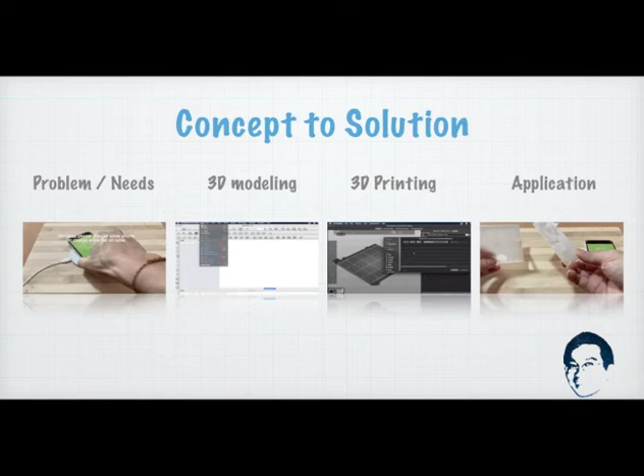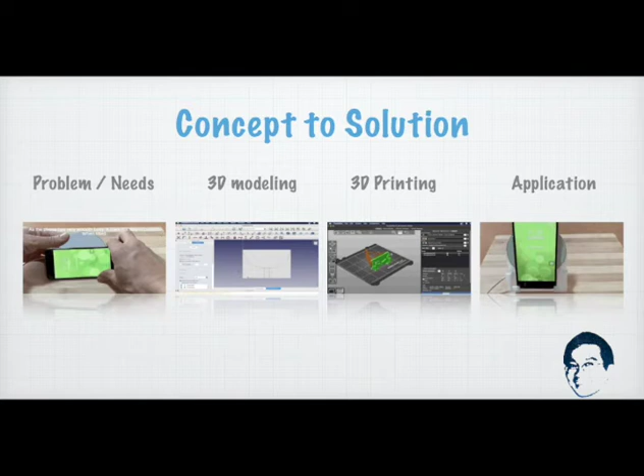In this video, I'm going to touch on how to model a smartphone stand for a wireless charger so that I can use the phone in portrait or landscape orientation at an elevated angle while the phone is being charged. I have these wireless phone chargers and the phone can only be charged with the wireless charger flat on the table. Even when trying to elevate it with some object, it is very difficult to ensure the phone keeps charging and allow use at the same time.

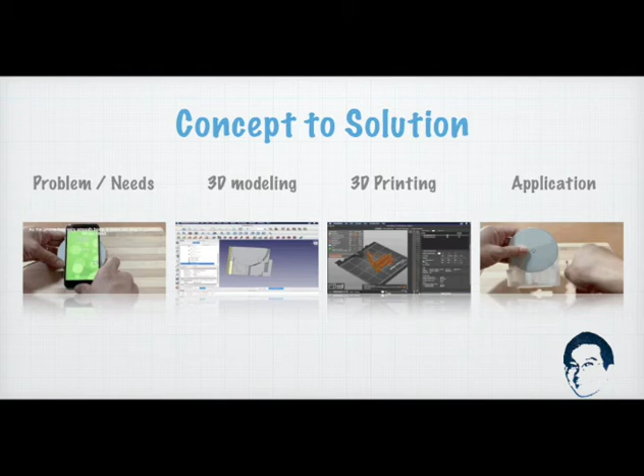So if there is a phone stand that can hold the wireless charger at an elevated angle and allow me to use it while charging, that will be good. Alright, let's get started with the 3D modeling of the wireless charger phone stand. Start your FreeCAD. If you do not have a copy of FreeCAD, go to freecadweb.org. There are installers for Windows, Mac and Linux.

In your FreeCAD, select Part Design Workbench, start a new document. You can go to File, New, or click on the New Document tool on the toolbar. Create a new body, a new sketch. Select the XY plane. The first thing we're going to create is a rectangle. Select the rectangle tool, sketch the rectangle, constrain the lower left corner of the rectangle to the axis origin.

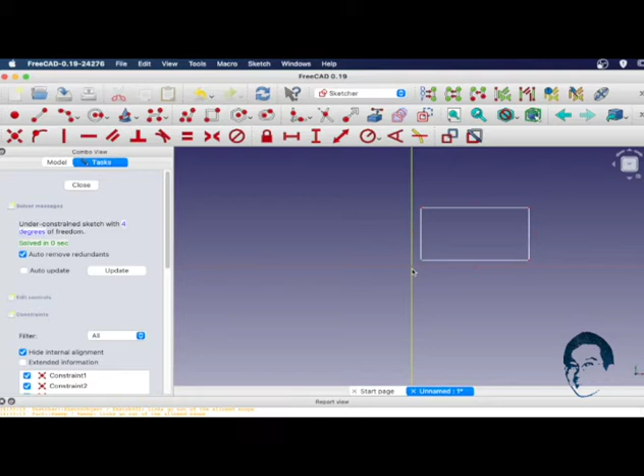The horizontal length is 96 mm. The vertical length is 71 mm. We are good with that. You can see that the sketch is fully constrained. Close it and pad it up with 9 mm thickness. Alright, the next thing, select the top of the surface here and create another new sketch here.

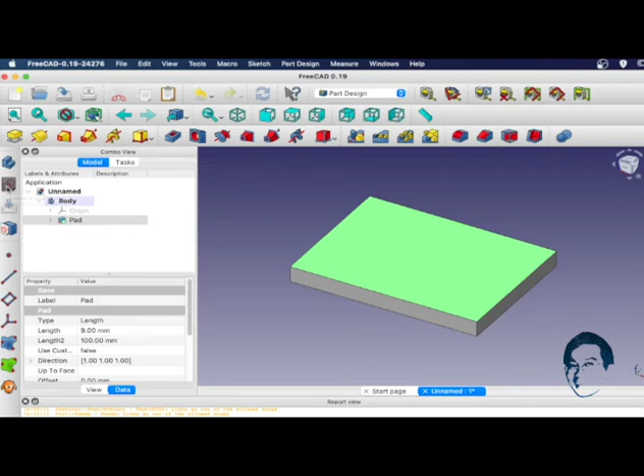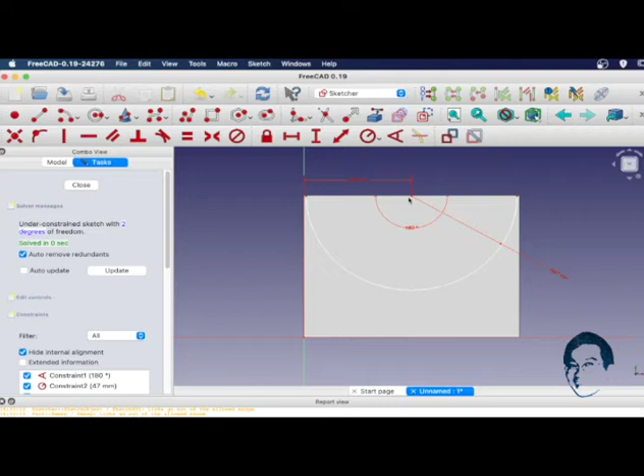For this, we're going to draw a semicircle up here to hold the wireless charger. The center and end point up from the center here. Draw the semicircle. Select the semicircle, pick the angle, set it to 180 degrees and the radius is 47. Select the center of the semicircle to the origin. The horizontal distance is 48. Right, and the vertical distance to the origin from the center of the semicircle is 71.

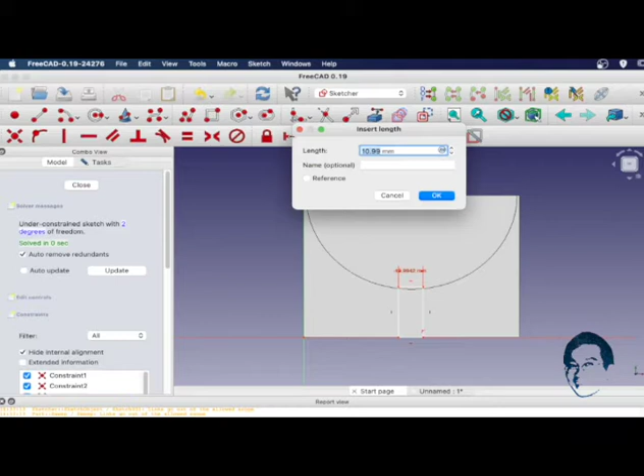Next, connect a straight line across the two end points of the semicircle. Okay, and you can see that it's fully constrained. Close it. Now we want to create a pocket here, and the pocket depth is 7 mm. Select the surface again, create a new sketch, draw a rectangle. Width of the rectangle is 10 mm. The distance from the bottom left corner to the origin is 43.

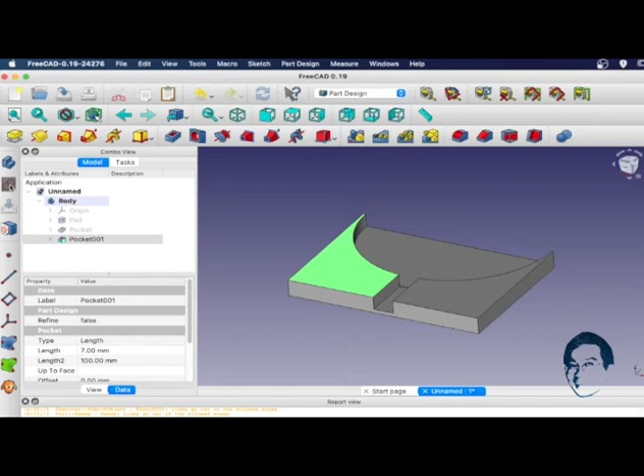The vertical distance will be 25 mm as long as it cuts across the semicircle. Sketch fully constrained, close it. With the sketch, create a 7 mm pocket. Select the top surface again and create a new sketch. Draw a vertical line along the y-axis. Connect the end point and draw a horizontal line along the x-axis.

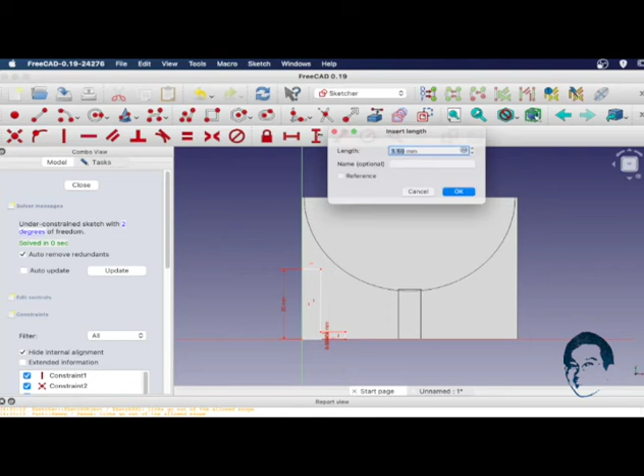Then vertical up followed by another horizontal line back and vertical up again and close the shape with the horizontal line. Select bottom left and the origin, constrain it. Select the vertical line on the y-axis and set the distance to 35 mm. The shortest vertical line to 2 mm. Set the shortest horizontal line distance to 9 mm. Next, set the longer horizontal line distance to 21 mm.

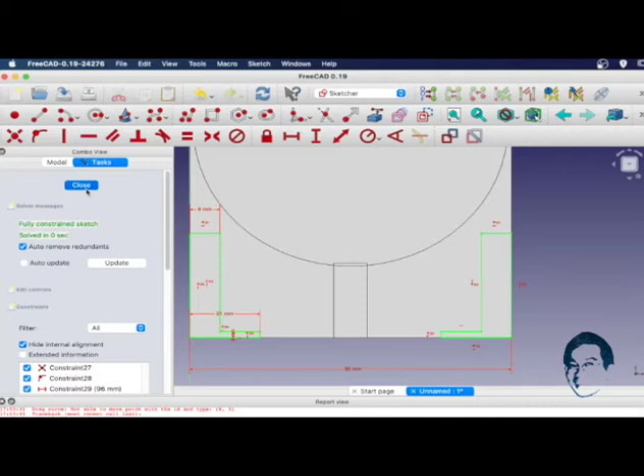You can see that it's fully constrained. Now let's mirror the shape over onto the right side of the sketch. Sketch fully constrained, close it. Next, pad the sketch up to 11 mm. Select the top surface again and create a new sketch. Draw a vertical line along the y-axis. Connect the end point and draw a horizontal line across the x-axis.

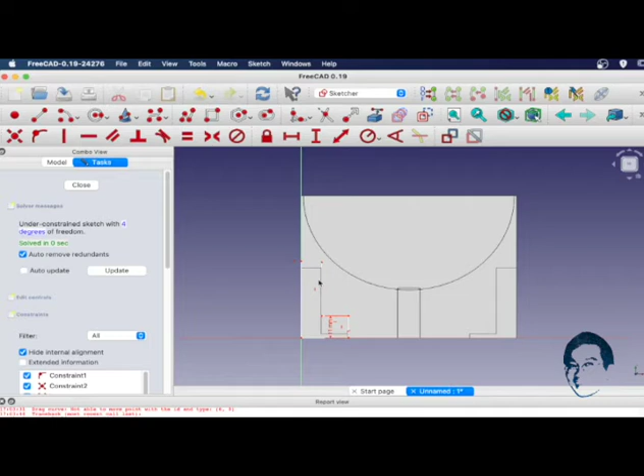Then vertical up followed by another horizontal line back and vertical up again and close the shape with the horizontal line. Set the shorter vertical line to 11 mm. Longest vertical line to 44 mm. Set the shortest horizontal line distance to 9 mm. Now let's mirror the shape over onto the right side of the sketch here. Sketch fully constrained, close it. Pad the sketch up by 2 mm.

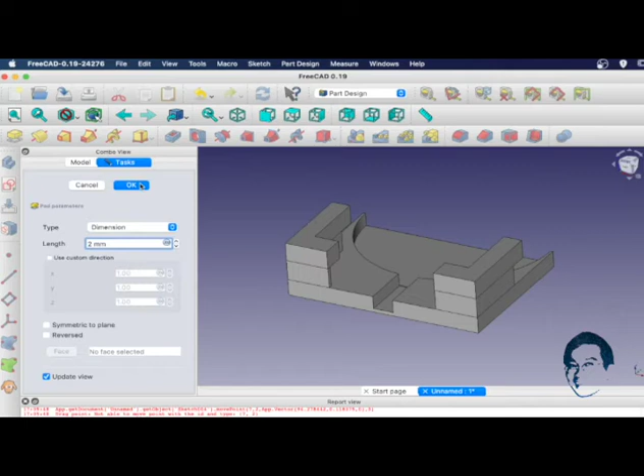Rotate the model to the back and select the surface. Create a new sketch. Use the line tool and sketch a U shape as what you see here. Horizontal, vertical up, horizontal again, and vertical down, and then horizontal across, vertical up, and close it with a horizontal line.

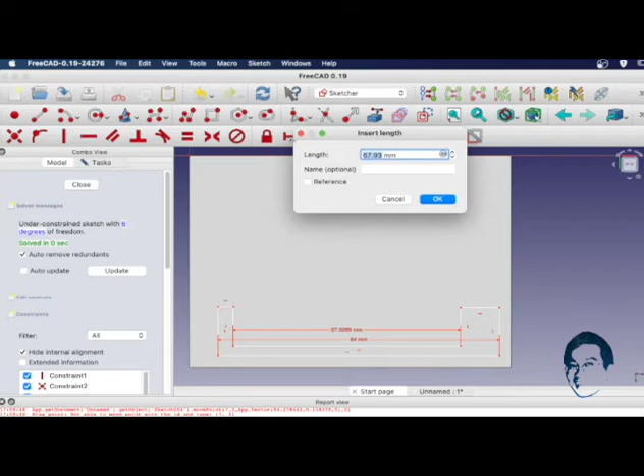The longest horizontal line distance is 84 mm. The next longest horizontal line distance is 80 mm. The longest vertical line distance is 17 mm.

And the width between the two horizontal lines is 2 mm. The width between the two vertical... bottom corner of the shape to the origin is 71 mm. And the width from the origin to the bottom left is 6 mm.

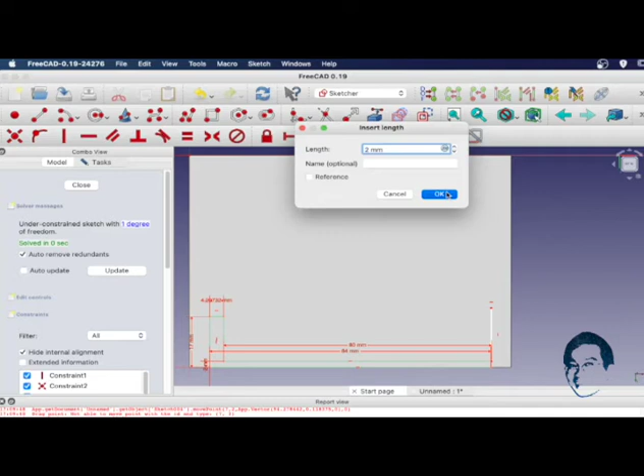The width between the two vertical lines is 2 mm. Same applies to the right side of the two vertical lines. Make the two vertical lines equal. Now the sketch is fully constrained, close it. Pad the sketch up by 2 mm. Select surface to create a new sketch.

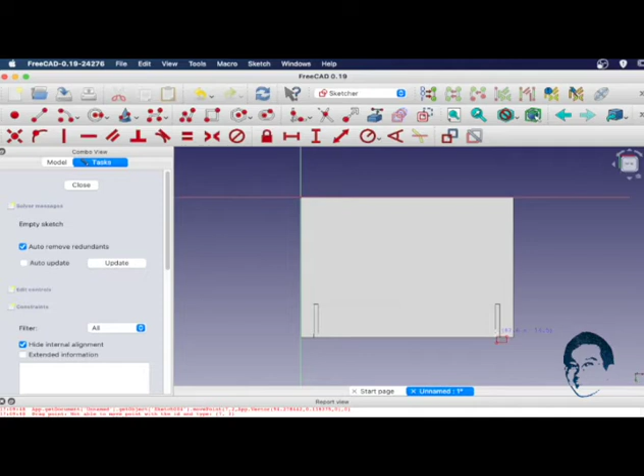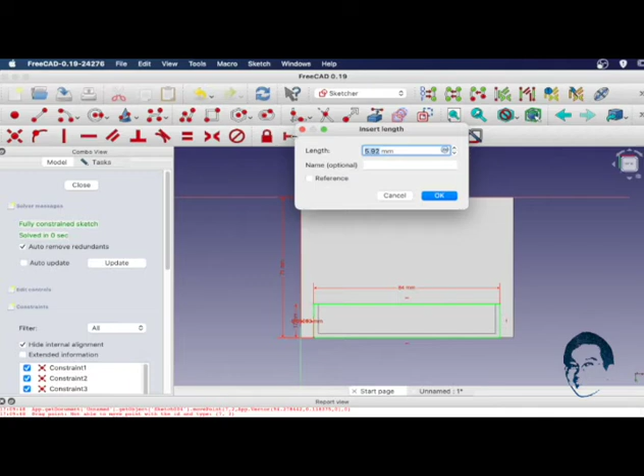Use rectangle tools. Draw a rectangle. The width of the rectangle is 84 mm. The height of the rectangle is 17 mm. The bottom left corner to the origin, the vertical height is 71 mm. And the bottom left to the origin, the width is 6 mm. Sketch fully constrained, close it. Pad the sketch up by 2 mm.

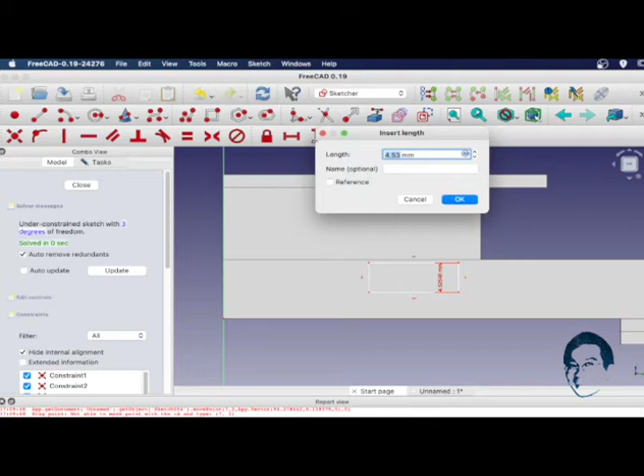Create a new sketch. Use the rectangle tools to sketch a rectangle. The height of the rectangle is 6 mm. The width of the rectangle is 12 mm. From top left corner to origin, the horizontal distance is 23 mm. Top left corner to origin, the vertical distance is 8 mm. Sketch fully constrained, close it.

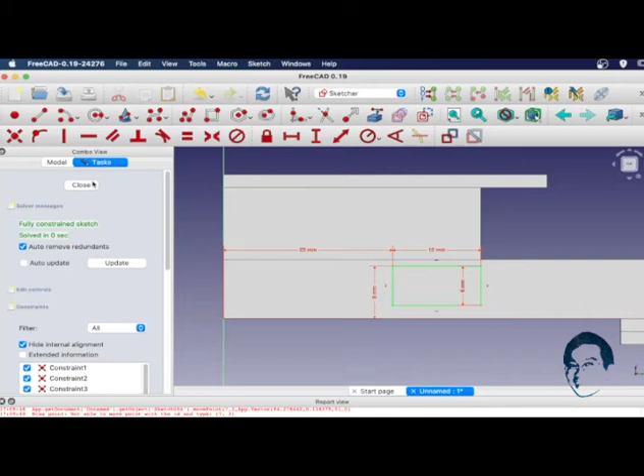Create a new sketch. XY plane, change the mode to wireframe. Select a straight line. Set the angle to 30 degrees on the line with the x-axis. The distance from the end point of the line to the origin is 96 mm, and the height from the end point to the origin is 29 mm. Close it.

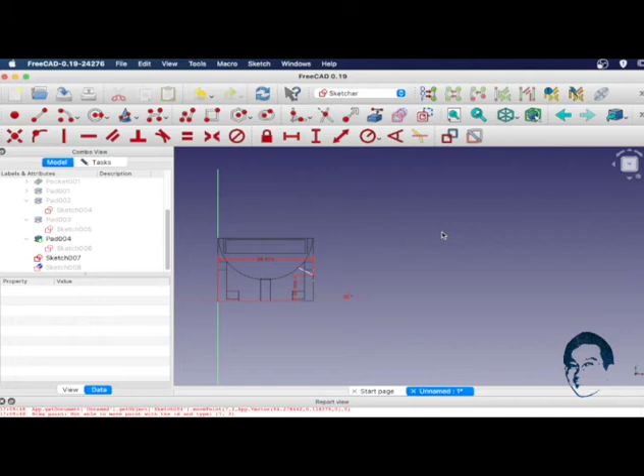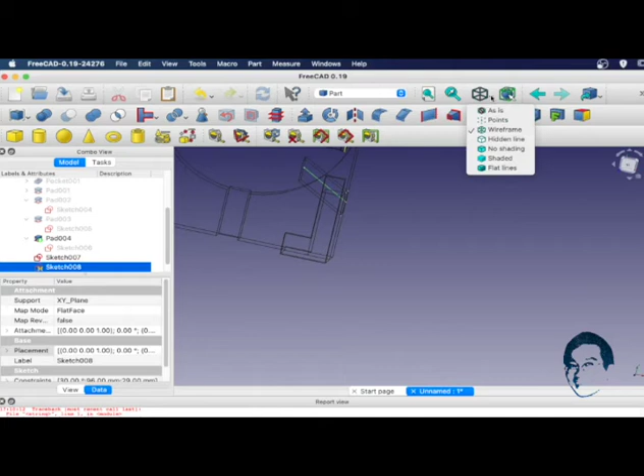Select Part Workbench. Then Sweep Utility. Select Rectangle Profile. Check Create Solid. Click on Sweep Path button. Select the line and click Done, then OK. Change it back to as is. Select the object, then the sweep object, followed by Cut. And you can see the hole is being cut.

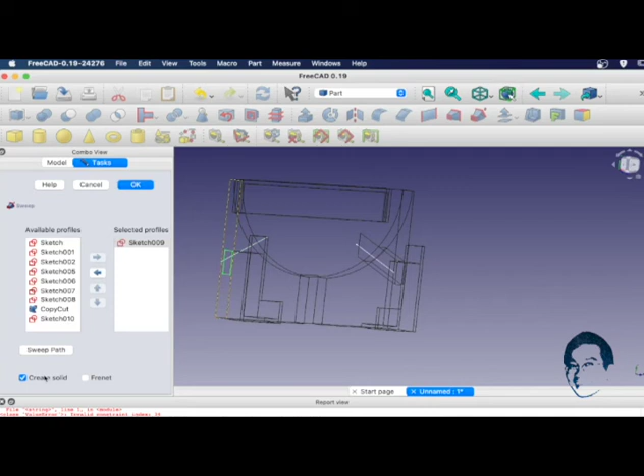Go back to Part Design Workbench. We will repeat the same cut on the left side of the object here. Now we have both hole cuts. The next thing we're going to do is to add some fillet onto the object itself. Select the top edge of the two shapes, followed by the lower edge, then the fillet tools. Set the radius to 3 mm.

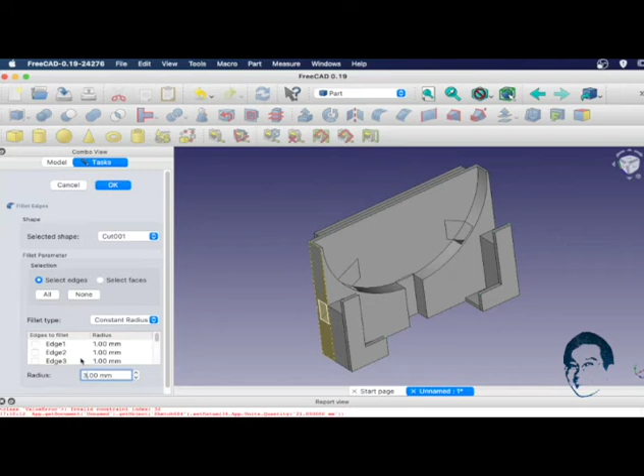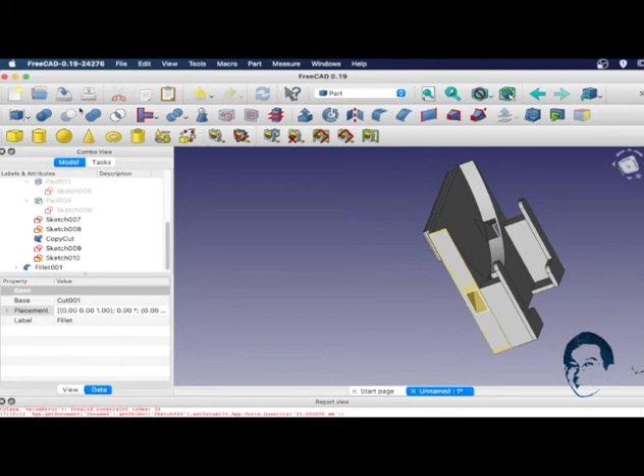Next, rotate the model. Select the top edge and the side edge, followed by the fillet tool. Set it to 1 mm radius. Alright, that's what we need to do for this model itself. Next, save the model. We'll give the model the file name of Charger Part 1.

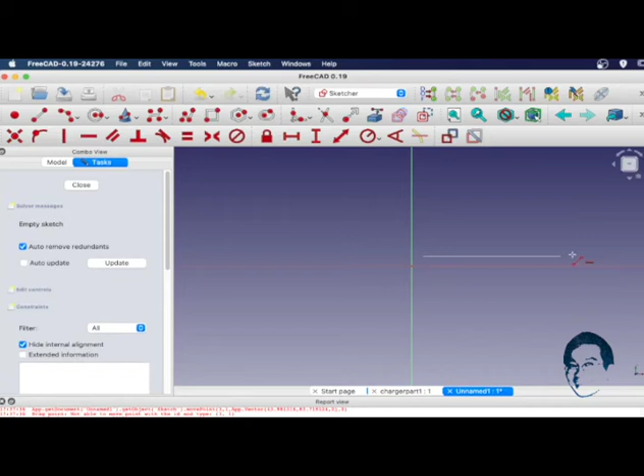Go to Part Design. Next, create a new document, new body, followed by a new sketch. Select XY plane. Take the line to draw a horizontal line along the x-axis. Set the line distance to 81 mm. Select the left endpoint of the line and the origin. Constrain them together.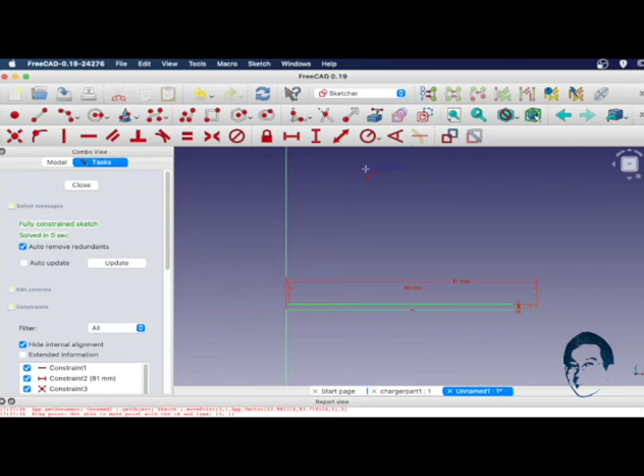Draw a vertical line up from the right endpoint and another horizontal line to the left. Select the horizontal line, set the width to 80 mm. Select the vertical line and make it perpendicular to the axis. And select the vertical line and set the distance to 2 mm. Take the line to draw a diagonal line to the y-axis. Set the length to 81 mm.

Draw another line parallel to this line and set them to equal length. Next, connect the two top endpoints with another line and set the angle between the short line and the long line to 90 degrees so that they are perpendicular to each other. Set the short line distance to 2 mm. And between the two lower endpoints, set the distance between them to 2 mm as well.

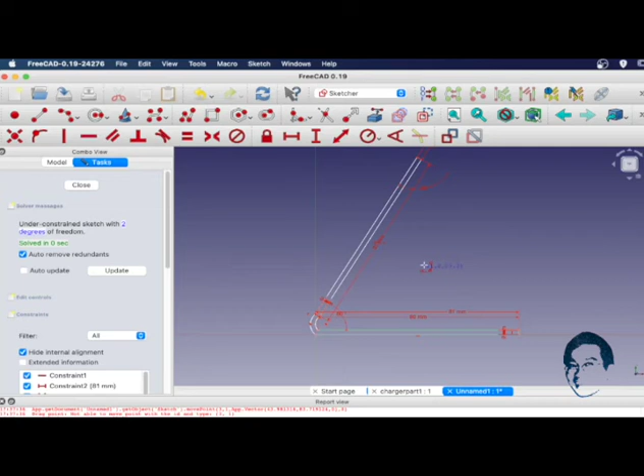Constrain the endpoint to the y-axis. Select the lower diagonal line and one of the horizontal lines, set the angle to 60 degrees. Next, take the arc tools and connect the line together between the outer line and also the inner two lines. Make them as smooth as possible. Close sketch. With the sketch, pad it up to 72 mm.

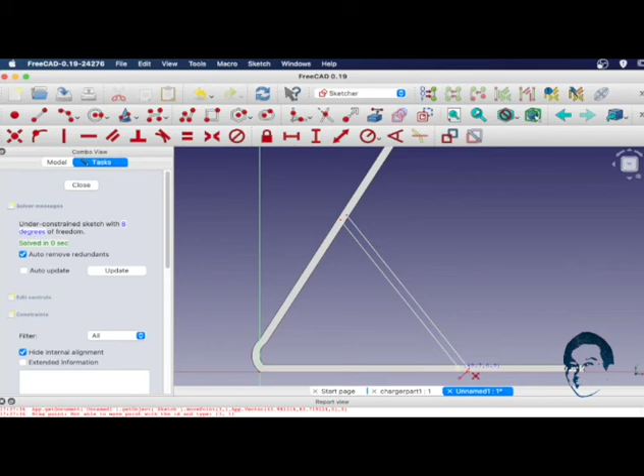Select the surface of the side, create a new sketch. Use a line tool, draw two lines to cross the shape. Connect the two endpoints with the line again. Set the width to 2 mm. Set the distance between the origin to the first point to 54 mm. Set the angle between the line to be 60 degrees.

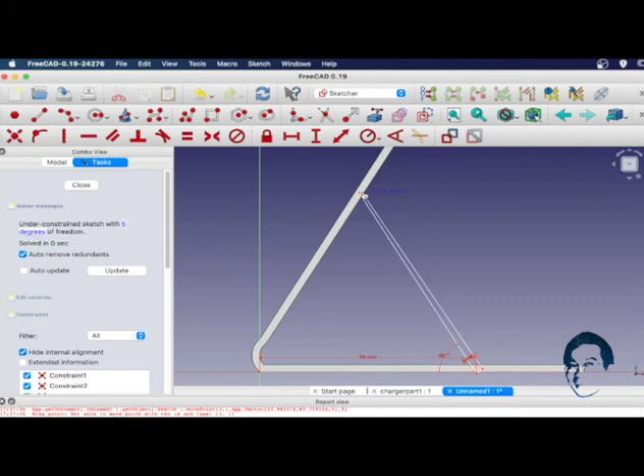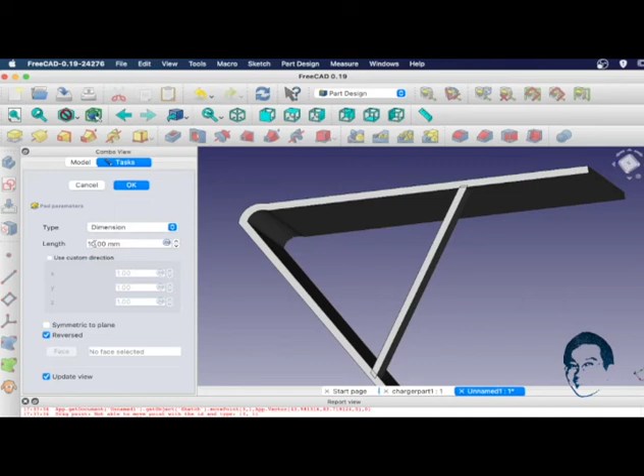Now set this distance to 2 mm as well. Do a slight adjustment to make sure that they are in the drawing. Close the sketch. Now pad it up, select reverse and change the length to 6 mm. Now we'll repeat the same on the other side of the object itself.

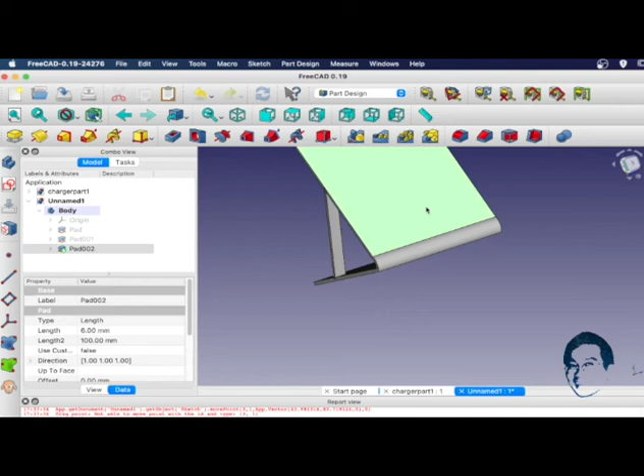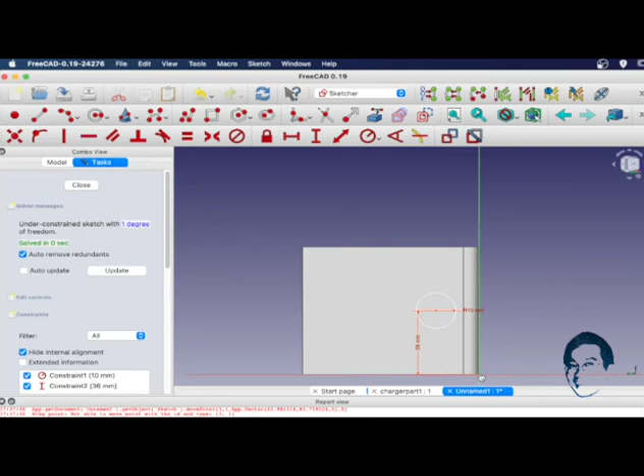Rotate and select the surface here, create a new sketch. Select the circle tools, add a circle to the surface here. Set the radius of the circle to 10 mm. Next, from the center of the circle to the origin, the vertical height is 36 mm. And from the center of the circle to the origin, the horizontal distance is 20 mm.

We are good. Close the sketch. Create a pocket of this. Alright, we will just take the default setting, close it. This one looks good. The next thing we're going to do is to select the four corners here. Select the fillet tools. Add a 3 mm fillet for this.

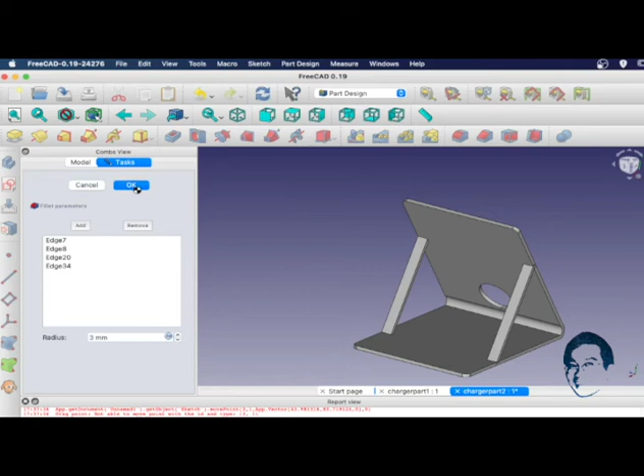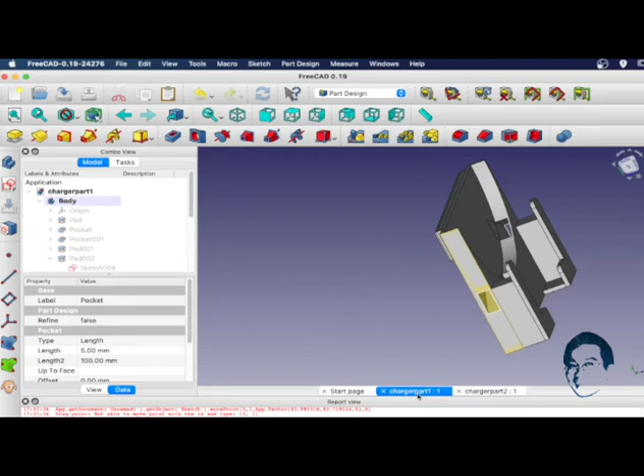Alright, save it and we'll call it Charger Part 2. Alright, with that we can export it to STL format. Select the object and export to STL Charger Part 2. Save it. We have yet to export the Charger Part 1 to STL, so let's do it. Select the model and export it to Charger Part 1.

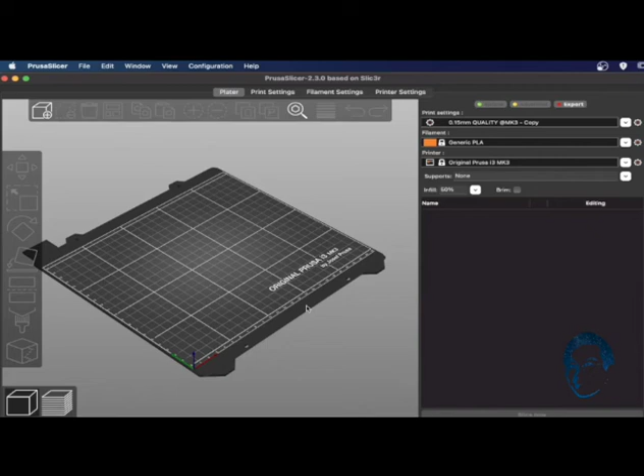Save it. With the 3D model done and exported to STL format, we are now ready to import the STL into the 3D printer slicer software. In the slicer software, click Add, select the STL file Charger Part 1 and Part 2, open it,

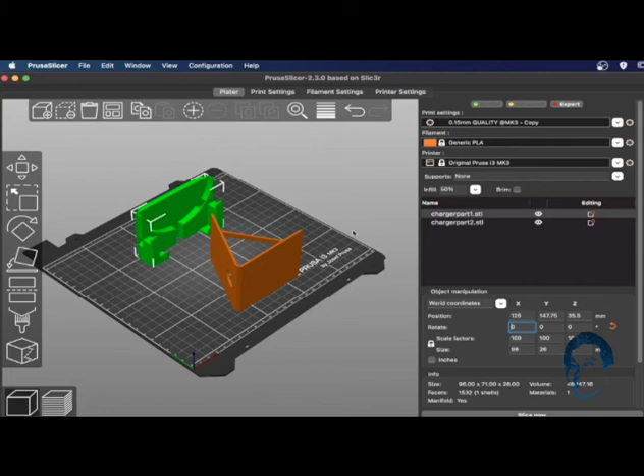click on Arrange. We will need to rotate the first part of the object, rotate 90 degrees by X-axis, rearrange them, and we also add the support from build plate itself. This will allow the slicer to add the support structure for the protruding part of part 1.

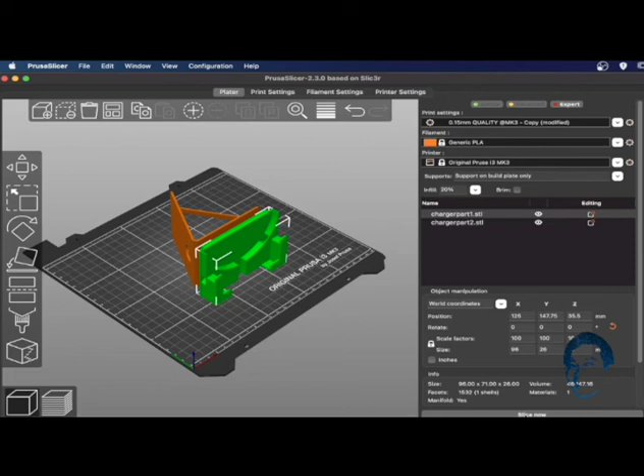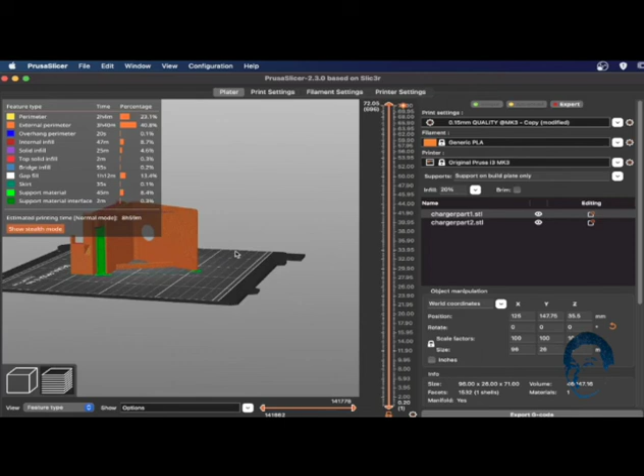For this, we will print with PLA, and the infill we will leave it at 20%, and that's sufficient for this to print. Alright, if we are good, we click on Slice now. And the green color here shows the support structure that we added. You can rotate it to look at the various angles of how it looks. You can drag the orange color bar on the right to look at how each layer of the slice looks like.

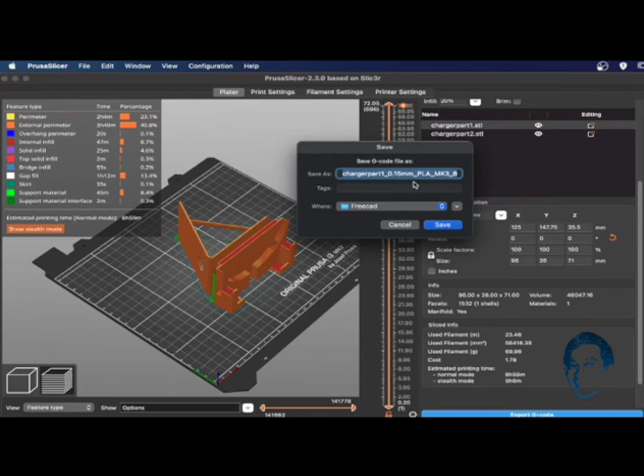Go to the lower right button, you can see that this model requires about 9 hours to print, and it will require about 23 meters of filament. When everything is good, click on Export G-code to get the model exported to the printable format. Use the default name given, or you can key in your own name for the G-code. When it's done, a pop-up message will show you export is successful. Now you can copy the G-code to the printer to print.

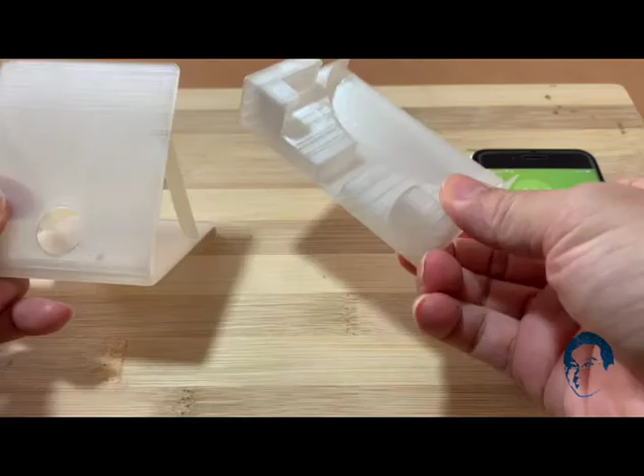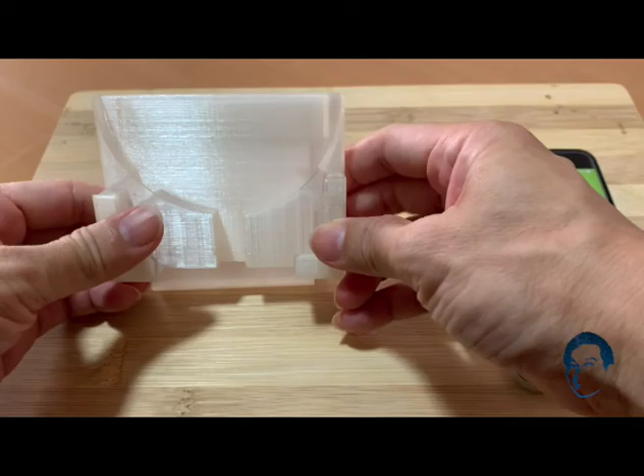With the 3D model printed, let's put the wireless charger with the phone stand together and see how we can use the phone on it. Take the printed parts, put them together. Take the wireless charger, insert the charging cable through the left hole and put that into the connector. You can see that the wireless charger sits properly onto the semicircle on the stand.

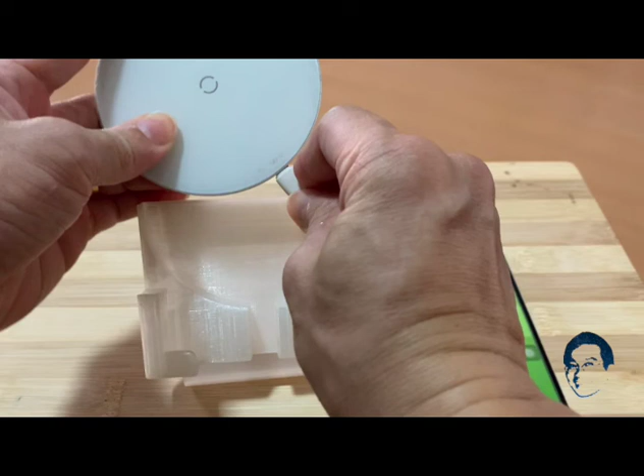Put the phone on and you can see that it's charging. Rotate it to landscape, it's still working, and you can move them in different orientations according to your preference with one hand. The stand design is for you to change the cable, with the cable inserted into different sides of the stand, so that when you use it on your table, you can switch them accordingly without obstructing your work.

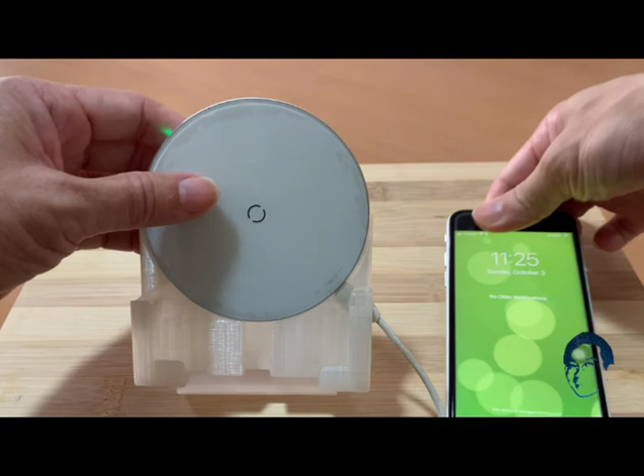The circle on part 2 is for you to insert the cable through, so that you can use it with the center slot for the charger. This will make the cable more managed during the application. Likewise, everything works according to what we intend it to be.

Let's recap what we have covered. I would like to use my phone on an elevated angle while charging it with the wireless charger. We use FreeCAD Part Design and Part workbench to model parts with line, rectangle, circle, arc, fillet, equal, parallel, sweep, and cut tools to create the phone stand.

Once the 3D model is completed, we export it to STL format that can be used in the 3D printer slicer software to slice it for 3D printing. Finally, with the printed part, the wireless charger is put together with the phone stand that allows me to use the phone at an elevated angle while wirelessly getting charged.